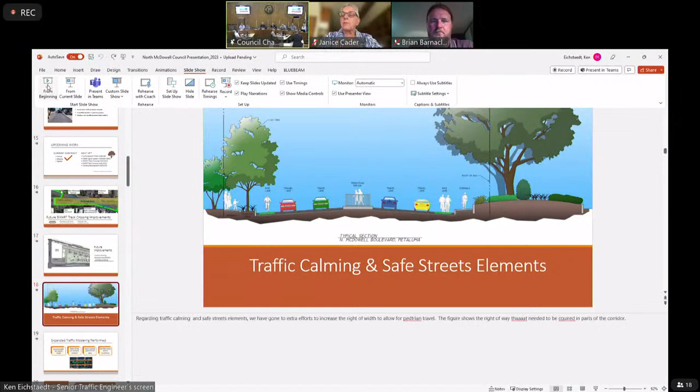Thank you very, very much, Mayor McDonnell, and good evening, council members. We're delighted this evening to present an update on our North McDowell project. We've been hard at work since awarding the contract last fall, and staff has many exciting things to share with you this evening. Tonight we have our senior traffic engineer, Ken Eichstaedt, seated next to Jeff Stutzman, our city engineer, who will lead the presentation this evening. Go ahead, gentlemen. Thank you.

Thank you very much, Mayor McDonnell, council members, the public, and the staff. This has been a long time coming, and we're not finished yet, but it's good news. At least I hope it is for you. I think it will be. So as we talk about the North McDowell Complete Streets project, I just want to emphasize we've really listened to the community, and there's a slide in particular that shows that. Since our last public workshop in May, and the council award of the construction contract back in October of last year, we've really done a lot.

But we want to focus on the work that has been done. We want to focus also on traffic calming, the active transportation elements and the transit improvements, trees and landscaping, overall the safety improvements along the corridor, and then provide you with a summary.

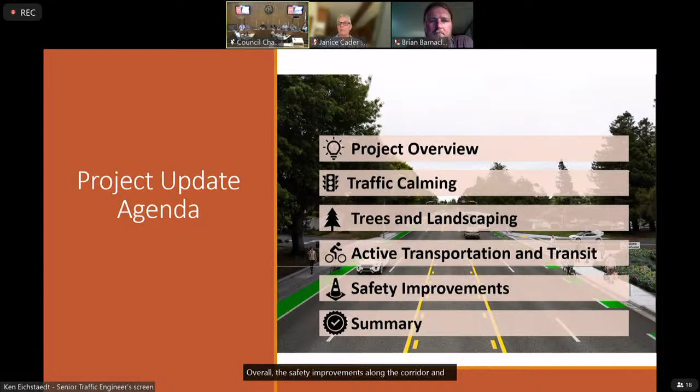So in the project overview, the key project goal is safety. Safety for all the users along this 1.75 mile corridor. So in doing that, we need to rebuild the pavement structure. We need to improve the active transportation and transit facilities. We need to find ways of minimizing the congestion that occurs along the corridor. And then we need to find ways of also enhancing the commercial activity that is in this area.

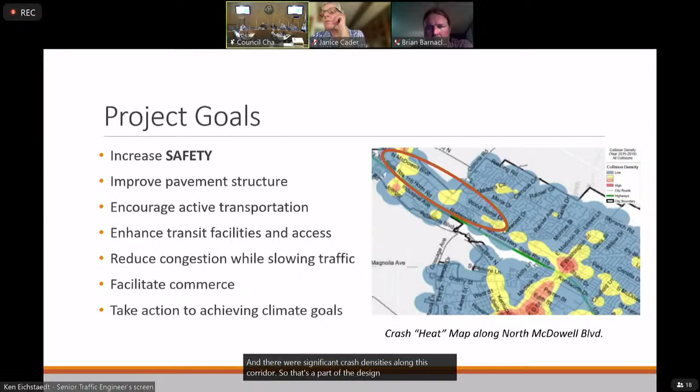We're taking direct action to achieve our climate goals in this project as we've moved it forward. So the image on the right is a heat map of the crashes that have occurred, shown in the circle there. And there were significant crash densities along this corridor. So that's a part of the design, the planning design process that went into this project.

So looking at the entire corridor from Sunrise Parkway to Old Redwood Highway, 1.75 miles again, we're going to look at one of the areas that I think sort of exemplifies the work that we're going to see in the final construction.

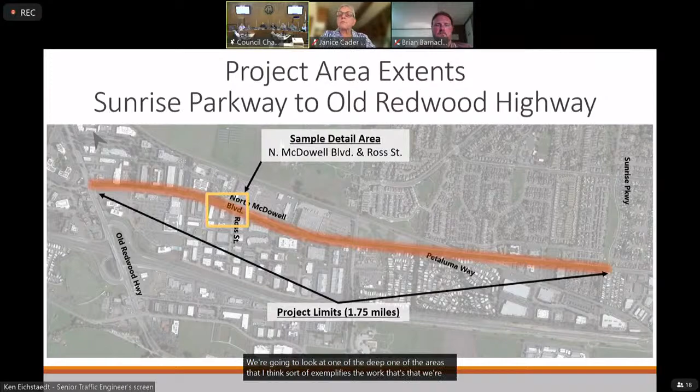Just north of Ross Street, we have two key business elements, and we've taken this area and greatly improved it. Probably one of the most important things is the pedestrian crossing we have, going from Lagunitas to Henhouse. That eliminates what would otherwise be a quarter-mile walk in either direction on the corridor for a legal crossing. We're filling the sidewalk gaps, putting in directional curb ramps, and putting in the bike lane.

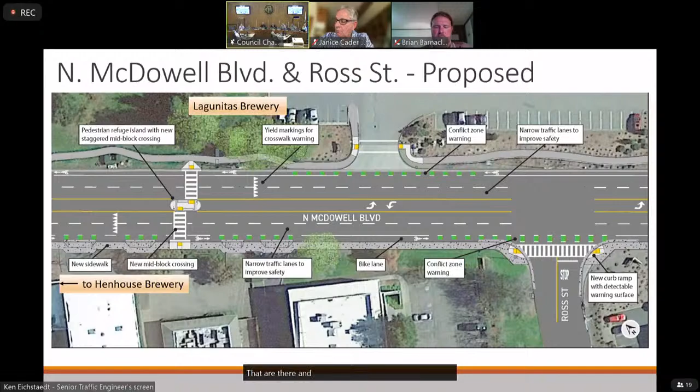The community engagement process was extensive. Our communications team has done a lot of work. We've had discussions with PBAC, the Pedestrian Bicycle Advisory Committee, twice. We've done a community workshop twice, a neighborhood workshop with Petaluma Estates, and gone to the tree committee. We've gone out and done door hangers, and we've got 4 portable message signs identifying the current construction work. We did a community information session, so I feel the outreach has been stellar. We can always make improvements and we'd like to hear about those, but I feel we've done a very extensive job.

The community workshops, we've had a total of 3 of those. In addition, we've advertised with city mailers in the Argus Courier, updated social media and community messaging, and gone door to door. There's also an updated web page.

Regarding the work completed to date, it's primarily been on the edges: we've closed the sidewalk gaps, which required acquiring right-of-way. We've put in curb ramps, narrowed the turning radiuses going into the streets—not everywhere, but on the key ones where we could—and shortened the pedestrian crossing distances. We put in pedestrian refuge islands, and we've done the utility upgrades needed to ensure this project stays untouched so we're not digging it back up in the near term.

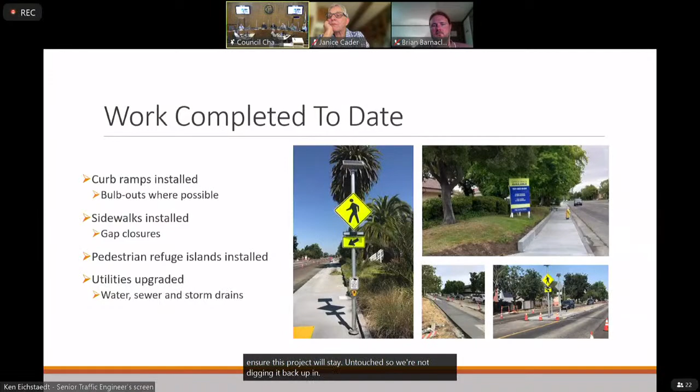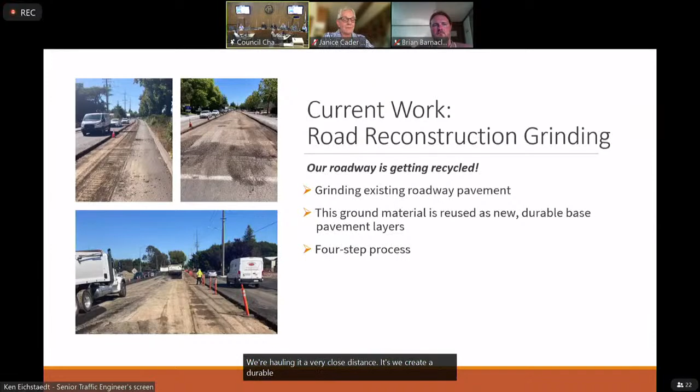The current work going on, which is the heart and soul of this project, is very disruptive. We've tried to minimize the impact, but we have to grind the pavement—and we're basically recycling it, so we're not hauling this material out somewhere far, just a very close distance. We create a durable base layer from it. It's a 4-step process to recycle this material.

Overview of the road recycling, which has been done before—fortunately Jeff has an extensive background on that. We do the grinding, then bring it over near the SMART station and process the material with an asphalt emulsion. We call this CCPR, Cold Central Plant Recycling. That material creates the base layer—you could almost think of it as a lean concrete mix. That material is then taken out and we do a final paving course on it.

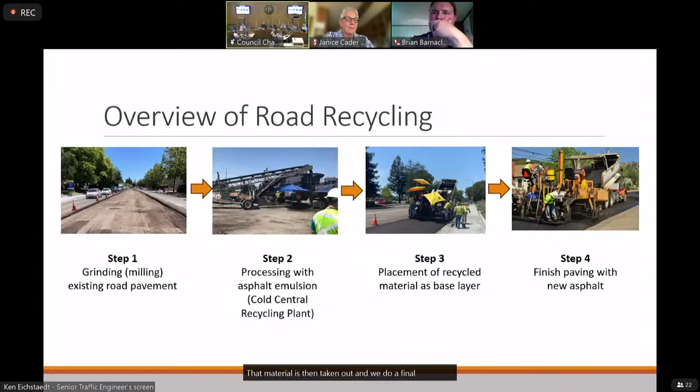The benefit of this current work, the CCPR Cold Central Plant Recycling method, is that we reduce construction traffic dramatically—we don't have to take it off-site dramatically, like over to the airport. We're doing it nearby. There's an 80% reduction in greenhouse gases with this, and it creates a new durable pavement base structure.

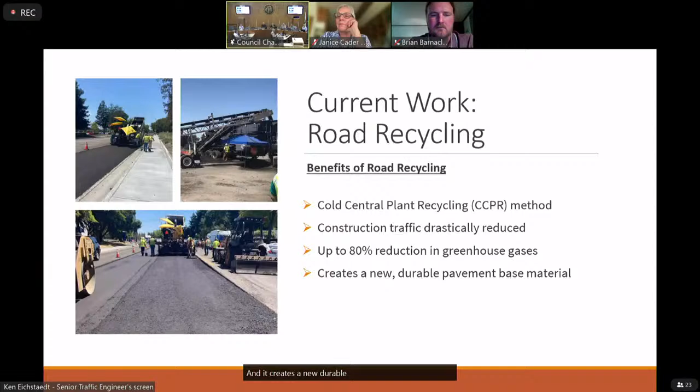This is our current contract. It's not the full project, but the current contract has paving, striping, and signal work to continue.

Next up—I wish I could say this corridor won't be impacted by other work, but it will. We're going to keep moving forward with landscaping and trees that will be put in. The HAWK system, the high intensity crosswalk signal system, we're looking at mid to late 2024. That requires PG&E coordination—they're a bit busy right now, but we've been in contact regarding that. We also have the SMART Track crossing, which will be in mid 2024.

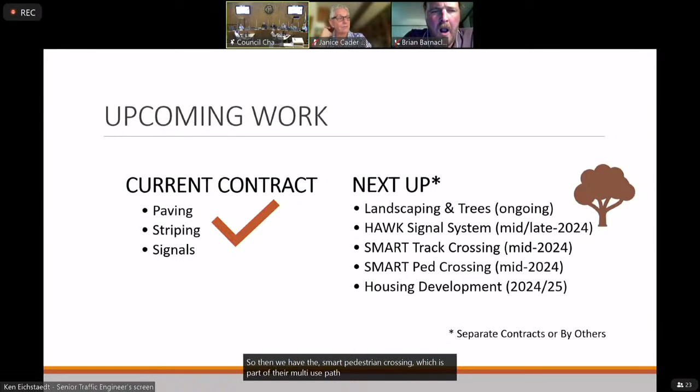Then we have the SMART Pedestrian Crossing, which is part of their multi-use path, and the housing development in 2024-25.

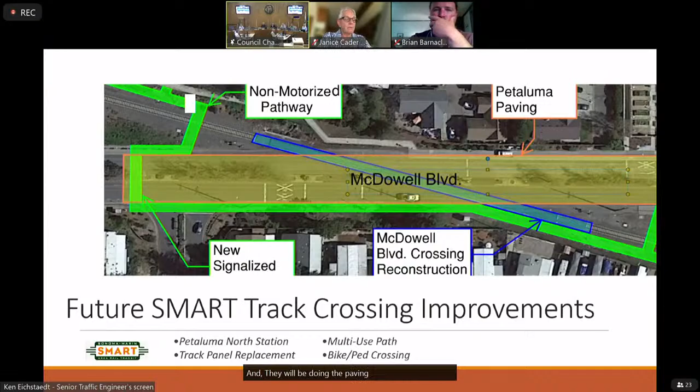So the future SMART Track Crossing in green is the connectivity to the multi-use path that will extend from Novato going all the way up to Penngrove and into Santa Rosa. This crossing is a new signalized crossing. We've got the track panel crossing, referred to as the McDowell Boulevard crossing in blue, and they will be doing the paving. We're going to hold the pavement back in this area until they get that work done next year. And then the future DANCO development, this is pending funding.

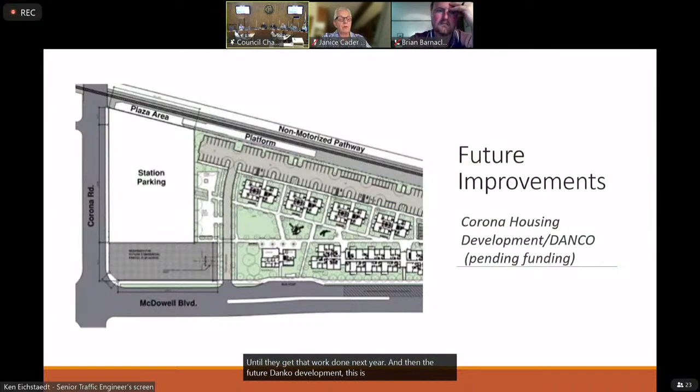So when we go into the traffic calming and safe streets element, I want to recognize in this cross section that we've got right of way that's had to be acquired. That was a major effort. We have that right of way, and it's allowed us to put in the sidewalk in many places that we had to do with retaining walls. We've got a pedestrian refuge island, we've got the bike lanes, and we've got the narrowed traffic lanes. So when you have a right-of-way width of 64 to 78 feet, in this 1.7 miles, there is a need to make best use of that right of way. And I feel like what we have before us is that.

So I'm going to turn it over to Jeff Stutzman, city engineer.

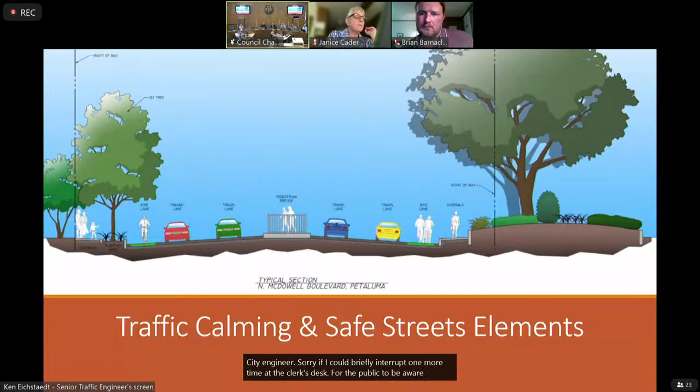Thank you, everybody. So the big comment that we heard the last time we were here was about a lane reduction or a road diet, transforming the existing North McDowell from 2 lanes in each direction to 1 lane, which we refer to as a lane reduction or a road diet. Basically, just as it says, it's putting the road on a diet.

So over the last couple months, we've hired a consultant to look at the corridor itself and see if that road diet, the lane reduction, is feasible. We did an analysis of the corridor using a system called Synchro, which utilizes existing traffic data that we've collected from the field, counts, including signal timing, and additional data from our traffic detection cameras, to really get a full perspective of the data, how many people are going, where they're going, to do a good analysis of the intersections to see what the actual impacts are of doing a road diet on an intersection like this.

Also, one of the benefits—so we originally started this Synchro analysis to see what the impacts were, but as some of you have noticed, as you've been driving along North McDowell, we have reduced the lanes down to 1 during construction to do that paving, to cure out the paving. By doing so, we've compared what the analysis has said to real life, what's happening in the field, to really see what 1 lane does on North McDowell and how those impacts affect the corridor as a whole.

So with that, the outcome—the analysis really showed that there was significant delay on North McDowell when we converted it from 4 lanes to 2 lanes. That's mainly northbound and southbound on North McDowell. And when we were looking at it, that's during the morning peak hours and the afternoon peak hours, with the afternoon being the highest impact.

Really what the model showed was congestion, and you'll see on the next slide how far that congestion really backs up during peak hours and how it affects operations on a daily basis.

One thing we've noticed in the field as we've converted it down to 1 lane is that the queue or backup from the signals is starting to back up over the tracks. So southbound going northbound on McDowell, traffic is backing up to a point where it's over the SMART tracks, to where we're having to bring out SMART personnel to flag to ensure people aren't getting stuck or stopped on the track, creating additional safety issues.

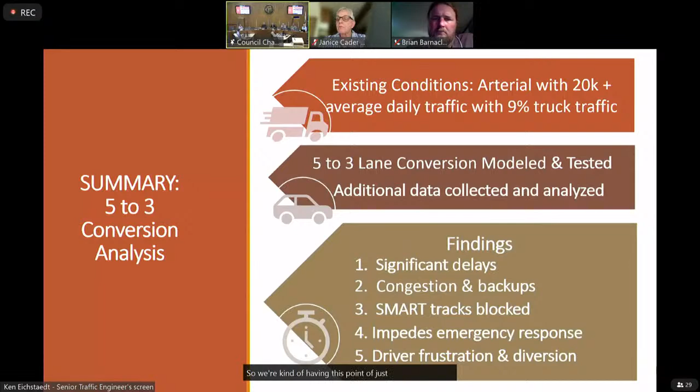You want to press play.

So as part of the analysis, the Synchro analysis comes with this kind of model video that shows the existing conditions and the proposed conditions of a road diet, showing in the peak hour what traffic looks like on North McDowell. This intersection analysis was Corona and North McDowell, selected because it's kind of the worst case scenario - North McDowell heavy volume, Corona heavy volume. So we're looking at that worst case scenario.

But again, very similar intersection to Old Redwood Highway, Redwood Way, and South Point, in the sense that North McDowell is still carrying that same volume. You're still going to have that same congestion on McDowell at those intersections.

Just to note, the difference between the existing and proposed are not lined up as a time lapse where each equal phase is going, so they're a little offset. But on the existing conditions, the one on the left, the peak hour, you really start to see what it's like today - you're seeing northbound, southbound phases going, how the backup is, how far it queues, same with Corona.

Then on the proposed, or the peak hour for a road diet where we reduced from 2 lanes to 1 lane, you really start to see the queue. As we're in this queue now, you can see the real impact it's having. You have North McDowell, northbound and southbound, backing up beyond the screen. The model really showed that the backup was causing about half a mile plus of what we call queue, which is the backup of cars.

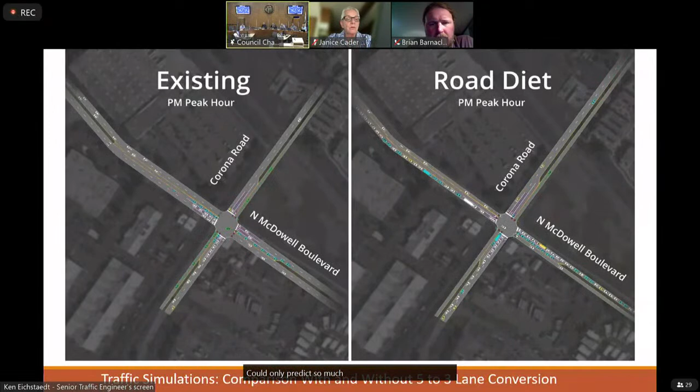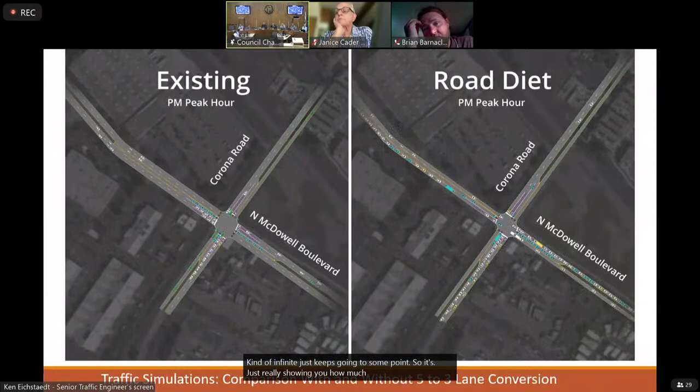If you want to just scoot it to 4, right there. Yeah, again you can kind of see it. I think what's noted on this 4-minute time shot is that traffic is backed up off the screen. So the model could only predict so much, to a point where the queue is so long that it's kind of infinite. It just keeps going to some point. So it's just really showing you how much cars are going to get backed up at these intersections.

And then finally, just conclusion of all that. With the signal timing and the delay that was shown, it's about 3 cycles for people to end up really getting through the intersection. So it really depends on when you arrive at this intersection. But if the intersection for that phase is 50 seconds of green, you're sitting there for 3+ cycles, that's 150 seconds, almost 3 minutes that you're going to sit there. So time adds up to do it.

Again, this was verified in the field, just kind of calibration of the model to see how accurate it really was. And the complaints that we've seen from the community have been equivalent to 10 to 15 minutes of added time to everybody's commute to just try to get through this piece of North McDowell.

And the big one in the middle that's in red is the safety issues of SMART. That's a big one. We never want cars to back up on the track. We never want them to get to a situation where the train's coming, the gates are coming down, and you have a backup and nobody can get out. So that's why during construction we had flaggers to absolutely avoid that issue.

And the last one is congestion and backup. The model really did show about a half a mile plus of congestion and backup. And it does impede emergency vehicles, and it depends where on the corridor, because some have a center turn lane that emergency vehicles can use. Again, that could be used by people trying to skirt traffic to get to the left turn lane at Corona. There's other areas where there is no turn lane, so there's just congestion that an emergency vehicle would have to go into the opposite or oncoming lanes.

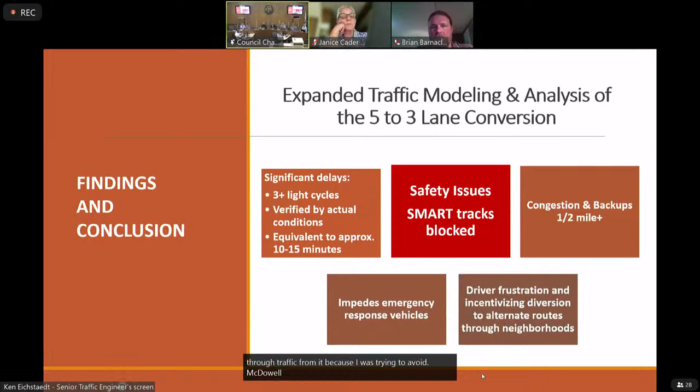Thank you, Jeff. And I should also note, we've met with SMART on this, and they had to reduce their train speeds from 79 down and have flaggers out there. There was a fair amount of coordination during this. So it was enlightening and kind of verified what was in the model. And I will say that I actually got almost as many complaints from city staff about it than I did from the public, which hardly ever happens because we have great city staff.

But on traffic calming on this corridor, we've got a roadway here that was 40, 50 years old. We're trying to plan for the next 40, 50. How do we do that in an intelligent way to move that forward? So we've narrowed the travel lanes to encourage lower speeds. Jeff has been working very extensively on the full signal system. In fact, I've walked with Jeff and the traffic consultant all the way from Ely all the way to Old Redwood Highway. And so we want to find ways through coordinated traffic signals to limit the speed.

The rectangular rapid flashing beacons, RRFBs, these can help warn drivers as they approach crosswalks of pedestrians and help lower the speeds. And we're going to go into a HAWK system for that. We just couldn't do it in this particular contract, but that will be happening.

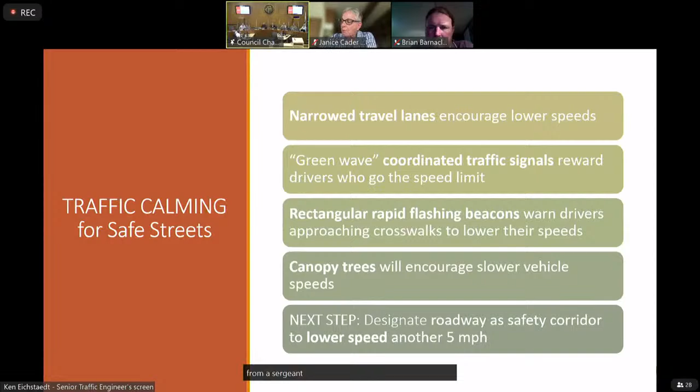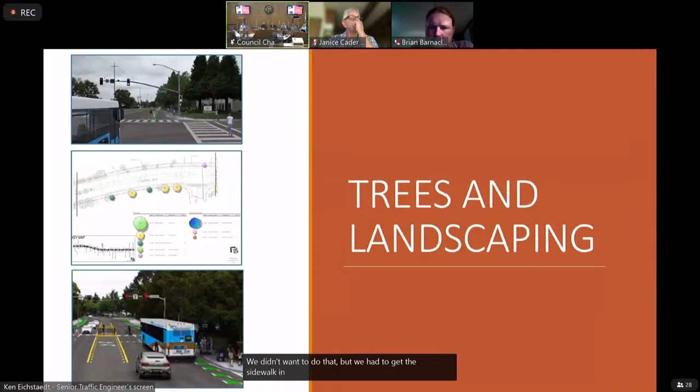So with regard to the trees and landscaping, we've had to remove a few trees. We didn't want to do that, but we had to get the sidewalk in. But going through that exercise, we found we have the potential of putting in 150 trees. So we've done a treescape design for the entire corridor, with a full sheet layout and details to do that work. It's separate from this project, but it's very tangible and realistic to do.

I've met with ReLeaf and have been very appreciative of their input. They've got great folks involved who are very passionate about it. They've helped refine the treescape plans and identify other types of trees to put in that they want to see. And I'll say that we have planting underway.

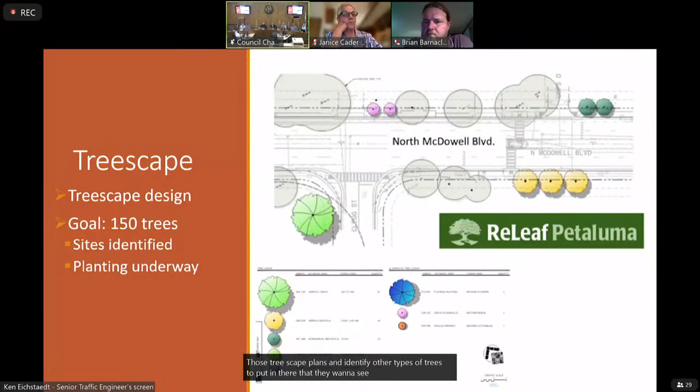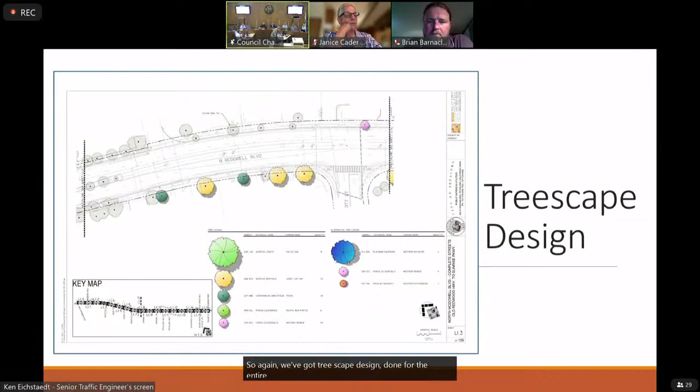So again, we've got the treescape design done for the entire corridor, and the details of how to correctly do this. We've got no shortage of examples of trees planted with good intent in the past, but we need to do a little better job. So we're taking the initiative here for the next 40, 50 years to improve this corridor. We've got root barriers and tree bags to help with watering. Once we get them established, we won't need to keep watering them.

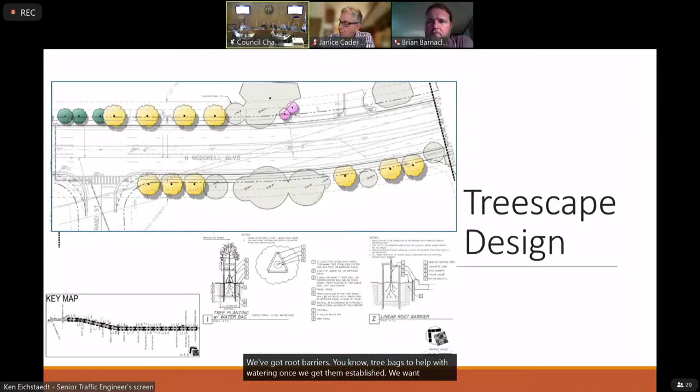I've been working with our environmental department, Chelsea Thompson and Danielle, to look at who the highest water users are. If we have to replace trees and the irrigation is impacted, we don't want to put back the same old thing, so what can we do? We've been collaborating with property owners who don't want to keep mowing, blowing, and maintaining turf - they want to save water and save money, so we can put in drought-tolerant landscaping. I feel that's been a very big benefit on this project. We targeted the higher water users, so that work is definitely going on.

I've made a strong pitch to property owners, and for the most part they are going onto that track.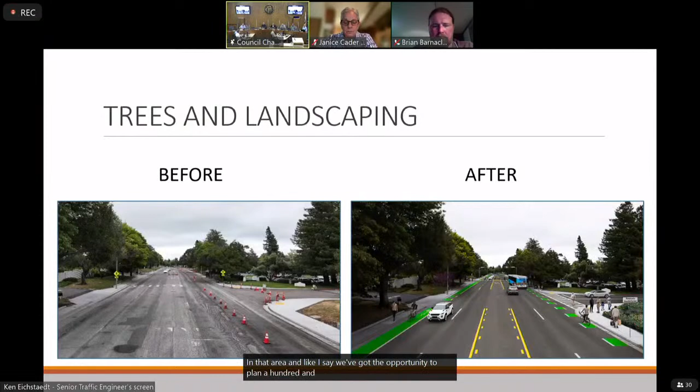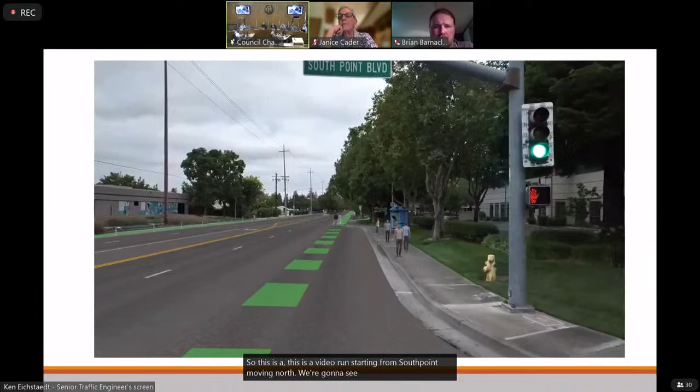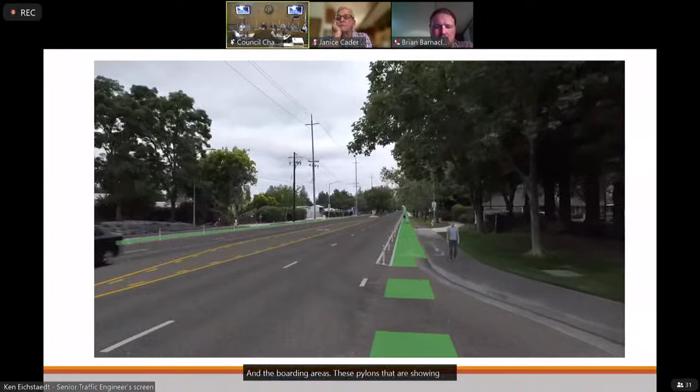So this is a video run starting from South Point, moving north. We're going to see some of the pylons. We've improved transit facilities along this corridor, expanding bus pads and boarding areas. These pylons, also called vertical stanchions, need careful design, but we've got a 2-foot buffer where we can put some of that in. And I'll point out the 40-mile-an-hour sign - that's going to go down.

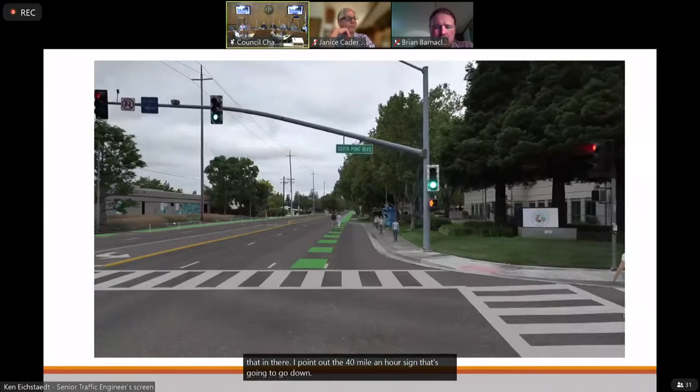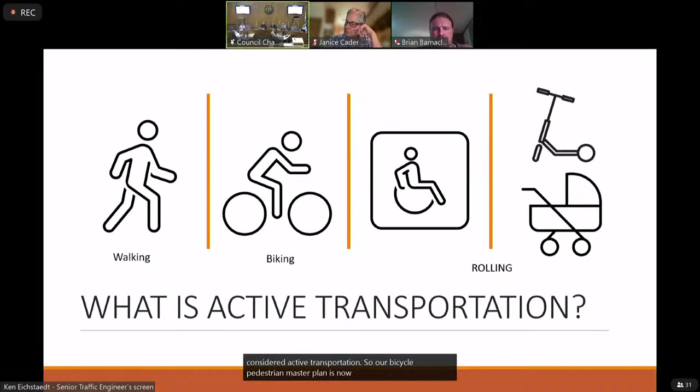All right, so then moving on to active transportation and transit upgrades. I wanted to make sure everybody's on board with active transportation - that's walking, biking, rolling, whether someone's pushing a stroller or scooter, or in a wheelchair. All of that is considered active transportation. So our bicycle pedestrian master plan is now called the Active Transportation Master Plan.

Some of the work we've done with pedestrian and transit improvements - again, we've started from the outside of the corridor, moving in. We've done over 1 mile of sidewalk installation, 47 curb ramps that are ADA compliant, and 6 of those had bulb-outs. The bulb-outs help us put in directional curb ramps to make sure that if you're visually impaired and trying to cross the street, you're oriented in the correct direction.

Very important: the 3 crosswalks being installed will have RRFBs, rectangular rapid flashing beacons, but those are going to be upgraded to high intensity activated crosswalks, or HAWK upgrades. Basically, a HAWK puts a full stop condition for vehicular traffic so pedestrians can cross. Pedestrians will have that stop condition, a shorter crossing distance, and a refuge island.

So all those are going to improve that experience. Having been down at the Petaluma Health Clinic and seeing people get off transit to try to get to their doctor's appointment, it really brought home the need for that. So we've also improved the bus stops and loading areas.

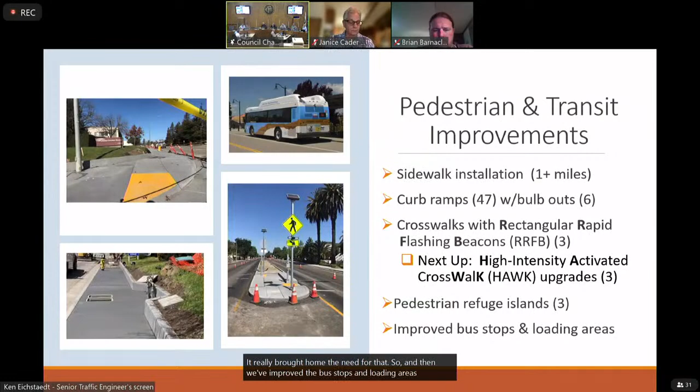The Hawk installation will go at 3 locations: Scott, Clegg, and Sunrise. We put in the foundations and conduits, but the lead times for the poles and the need for additional design work made it infeasible to include them in this current contract. However, they are part of the Complete Streets project overall.

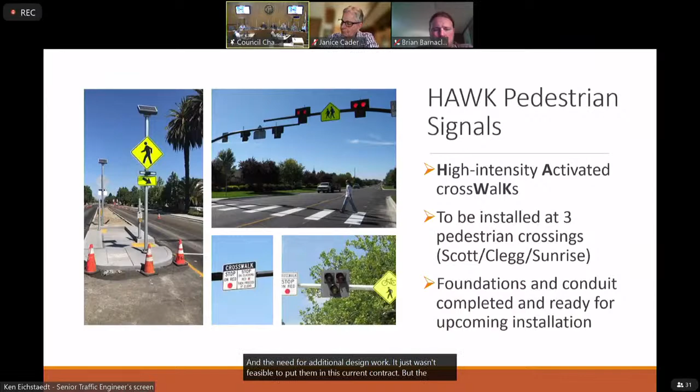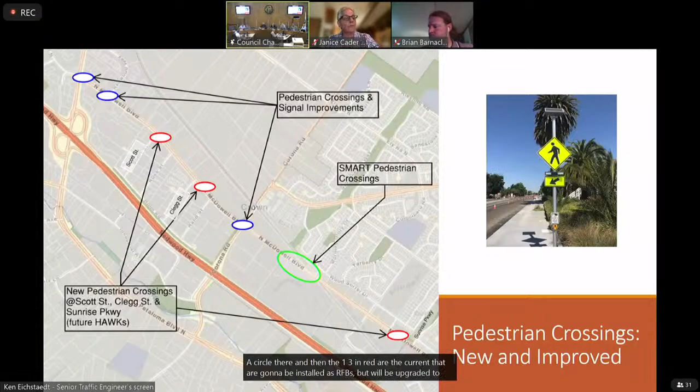Regarding the bike facility improvements, we've got buffered bike lanes, class 2, for 2.3 miles, shown in green. In the areas where the right-of-way width narrows down to 64 feet, we're going to have class 2 facilities for 1 mile, north of Corona.

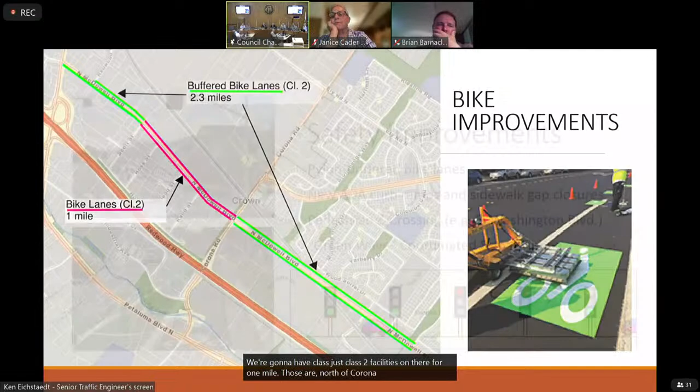For safety improvements, we want to put in something more than just buffered bike lanes, to get some vertical elements. We're referring to that as pylon buffered bike lanes. Some people may call them vertical stanchions or bollards, we've chosen pylons, but they all mean the same thing. We're going to go through that design for their implementation on this corridor.

We've got new ADA curb ramps and sidewalk gap closures as mentioned, and the pedestrian crossings, which are the Z pedestrian crossings with refuge islands. The picture at the top left is what we've done on East Washington across from the airport. And then the green wave, the coordinated signal timing for the corridor.

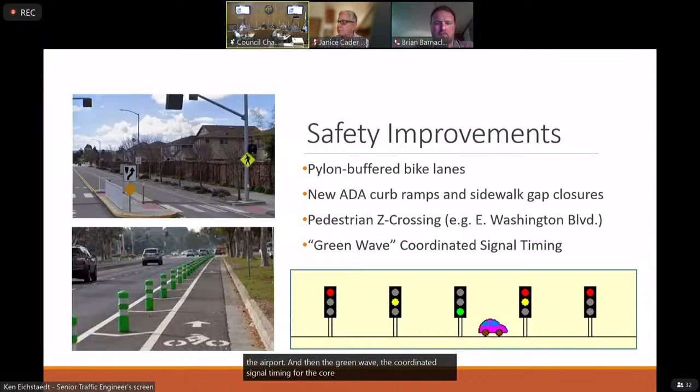So again, safe streets is priority #1. We've got the LPI, the leading pedestrian interval, to help extend safe crossing time for pedestrians in crosswalks, which will be implemented at all the signals. The RRFB and future pedestrian crossings further protect people in crosswalks. The pylon buffered bike lanes are for cyclist comfort and safety, and then there's the speed limit reduction.

Our project timeline: we started in December. Right now we are in road reconstruction, which will be over in approximately a week. We're done with the bulk of the grinding, and we're in the curing process for the road subbase. Then we'll move into the final paving course, signals, and striping, lasting into October. The trees and landscaping are ongoing, and in 2024 and beyond we have the HAWK installation and the SMART improvements.

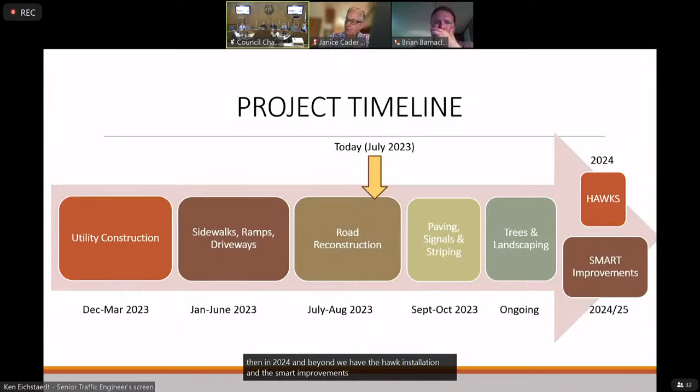So in summary... you want to do the summary? I think Ken said it very well from the get-go.

It's safety. That's really what North McDowell wraps up to, the #1 priority for us is safety, from bicycle safety, pedestrian safety, even vehicle safety. It's all users involved, from the traffic improvements, the signal work, the crosswalks and crossings that we've done. We even re-looked at the road diet analysis to see if that would be feasible, and it's definitely not something we would recommend based on the impacts it would have. But there are other opportunities to improve safety along the corridor.

Ken and I are looking at doing bike boxes at all the signalized intersections so we can get bicycles out in front of vehicles to make them more visible. We're even considering future projects to look at bicycle phases to help improve bicycle connectivity.

It's just everything on the corridor is really about safety. It's a big project for the city, coming in multiple phases. As we slowly wrap up this project, the next exciting phase is going to be SMART, with the new SMART station and SMART crossing. So there's a lot still to come and a lot of fun stuff still ahead for the corridor.

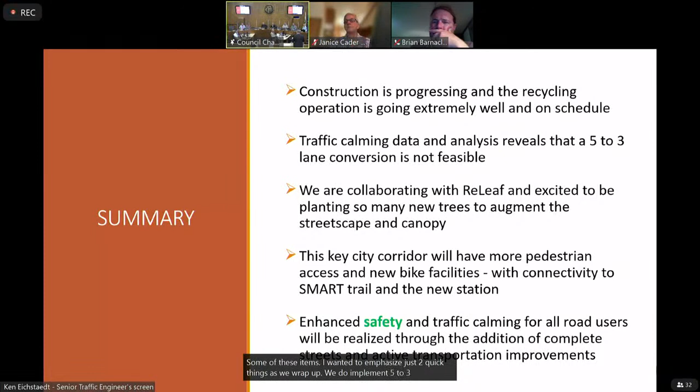I wanted to emphasize just two quick things as we wrap up. We do implement 5-to-3 conversions, or road diets, whenever and wherever we can. There's evidence of that with recent projects. In fact, we've had ongoing discussions internally as we begin design on future street projects - we always ask that question at the outset. That happened with McDowell. We did look at this prior to embarking on the design, and the initial modeling revealed what we see today and have confirmed. So what has been done since the bid award is a deeper dive, a second look.

We used state-of-the-art software, paid a little extra money to provide that 3D rendering, that animation. It's often done for roundabouts and major freeways, but we did it for this arterial street in our community. We felt that was very important to do a deep dive internally and make sure there wasn't a way we could do it.

You may recall discussions that traffic counts over 20,000 is a problem when it comes to 5-to-3 conversions, and our analysis confirmed that. Another concerning thing was that during peak hour, getting a fire truck or an ambulance through that intersection in particular - but our team has also looked at other intersections - is highly problematic with all that congestion. Our partners in public safety at the police department and fire department definitely share concerns.

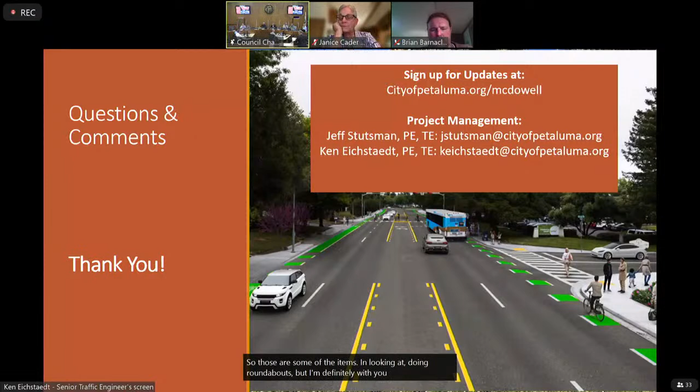So I could add too that the good news is a roundabout could be implemented in the future as a separate CIP should it be warranted or necessary. And Jeff, you were going to say something as well?

And like Christopher said, we didn't do an analysis of a roundabout here, but we've looked at other intersections. As an example, Caulfield and Lakeville - we looked at a very high level, preliminary, what would it take to do a roundabout there, and it would be a 2-3 lane roundabout. So they're very large, and to both their points, it takes a lot of real estate to make it work. But it can move the volume - it's a give and take.

On that particular corner especially, we have the creek, the floodway, that could be easily covered, increasing that space in that location. We still have the SMART station to be in, so we could take up a corner there. The other corner is basically some workshops, and I think we could probably even grab some space from them if we really needed to do that much more. So that's what I'm thinking for that particular intersection - I think there's enough space.

So I really would like to see that modeled within the model you're using, if we were able to do all that, and then look at the traffic pattern at that particular intersection, because that's a critical intersection. Just viewing the model that you had, I totally agree that a single lane with light systems absolutely is not going to work.

But if we turn it around and put the extra money and effort in, because we already have a road that goes over the floodway, we can expand that. That would increase the surface area tremendously. I'm sure we can work with SMART on that corner and the business on the other corner to make that happen. I just thought we could model it and see what goes in and what comes out of it. It'd be interesting to see if that actually increases flow and reduces congestion.

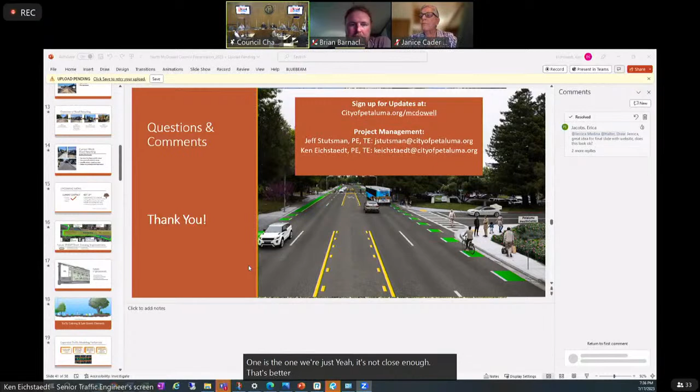Thank you, Mayor. I just want to voice support for a couple of comments already made. One is the one we're just discussing. I want to support Councilmember Barnacle's request to look at a way to get bollards on that 1 mile.

And certainly, I know there's no simple or easy way to do it. I think there's a lot of things difficult about what we're asking, and certainly I'd also put in support, since it's seeming to be better received than when I brought it up with some of the engineers at the very beginning, in terms of a roundabout being even something we could consider. So if there's a will, and I don't know if it's going to cost 3 times as much to do a roundabout, and then there may be other constraints on us, but I'd like to look at that as well as just the roundabout and the bollards between Corona and Scott. Thanks.

And I do want to have a word of appreciation for staff. They never used the word accident once in all of the terms about collisions. I know that's nuanced that we say crash and collision. We don't say accident. I do have to say, though, that I nearly got run over tonight at Howard and Washington at a signalized intersection, on foot. It's important that we do these safety things, but it's not the end all either. You still got to stay with your eyes open everywhere.